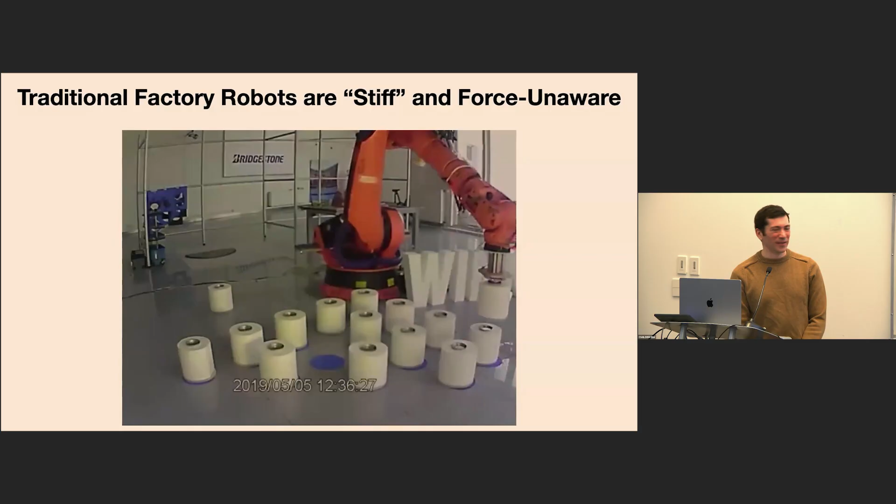They're simply position controlled, so all you can do is command the robot to go to a position, and it'll try to do that no matter what. If something gets in its way, one of two things will happen, or might be likely to happen: either the robot will break something in its surroundings, cause damage, or it'll damage itself.

So finally, let's fast forward to what is the frontier of robotics today. In the past decade, I think we've seen the rise of this paradigm with data-driven learning in simulation. These are just two examples from right before the start of my research career.

One thing that's really critical to understand about this data-driven learning is that it's different from the way that the other control systems I showed you before were designed. Instead of programming how the control loop should respond to different types of inputs, the control strategy is learned from experience in the simulator.

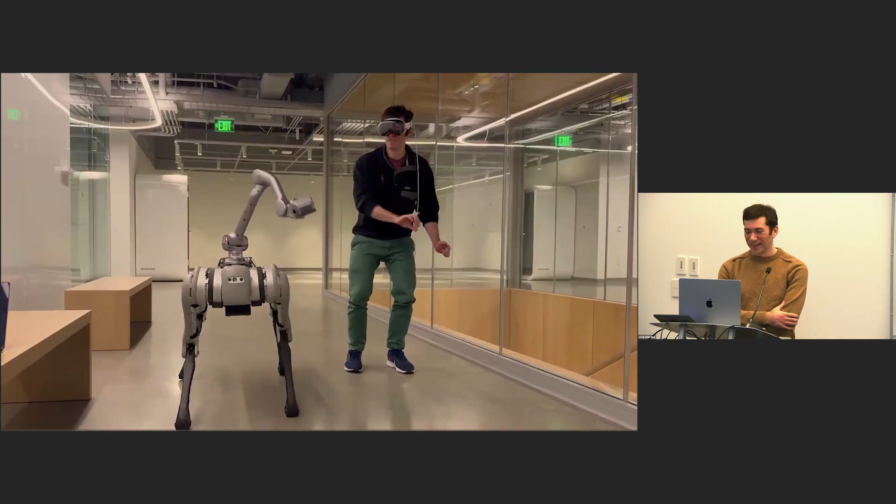We developed a controller that could both walk around and also move the end effector to match a teleoperator who's wearing a virtual reality headset capturing their wrist motion.

This was sort of an emerging but maybe known way of doing things at this time. You'd have some neural network policy, and it would observe the sensor data of the robot and output actions, and it would also observe the desired wrist command supplied by some teleoperation rig. But during training, maybe that would be randomized.

Our simple proposal, just to understand the properties of training something this way, is to replace the position command with a force command. So instead of the teleoperator saying 'go to this position,' the teleoperator will say 'apply this force.' That's especially relevant if the robot is, for example, pressing up against a surface like a whiteboard and needs to control how hard it's pressing, which might not be well described through just a position command.

But the question we ran into is how can we train this? The typical way of training would just be to have the robot walk around in free space. But if you try to apply some force in free space, the robot will never experience any external force, and the hand will just accelerate. This really is the key difference we need to think about in data-driven methods.

We don't just need to define the objective of the system and the model - the robot also needs to experience the types of interactions that we want it to be able to accomplish in order to learn a good response.

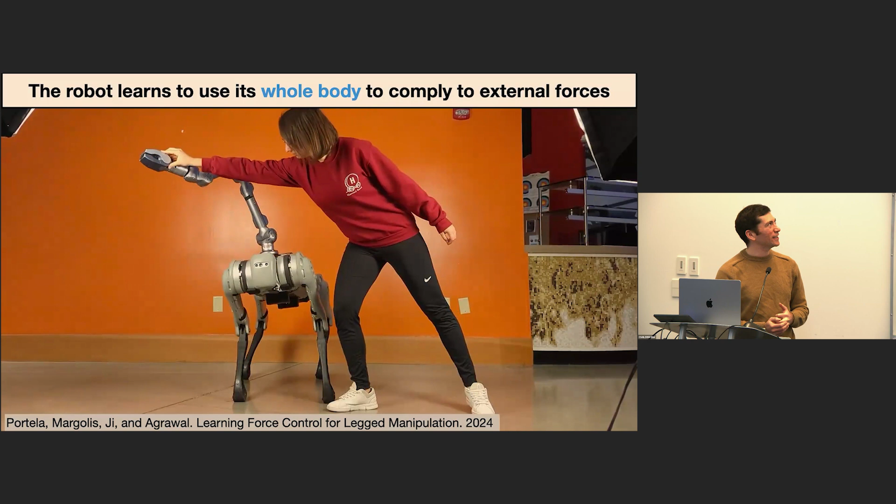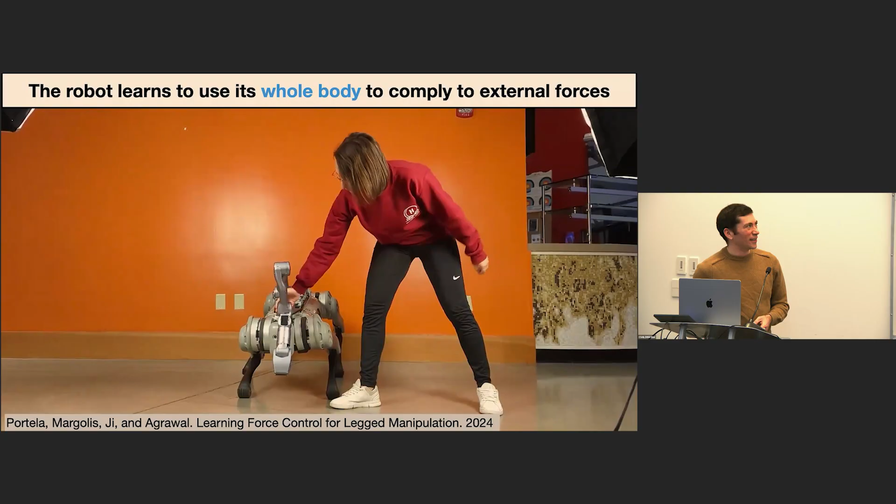We trained this policy and deployed it on the robot, and there's my collaborator Tiffany manipulating the end effector. The policy is able to realize this compliant control of the robot, where if a human grasps the end effector, they can move it around.

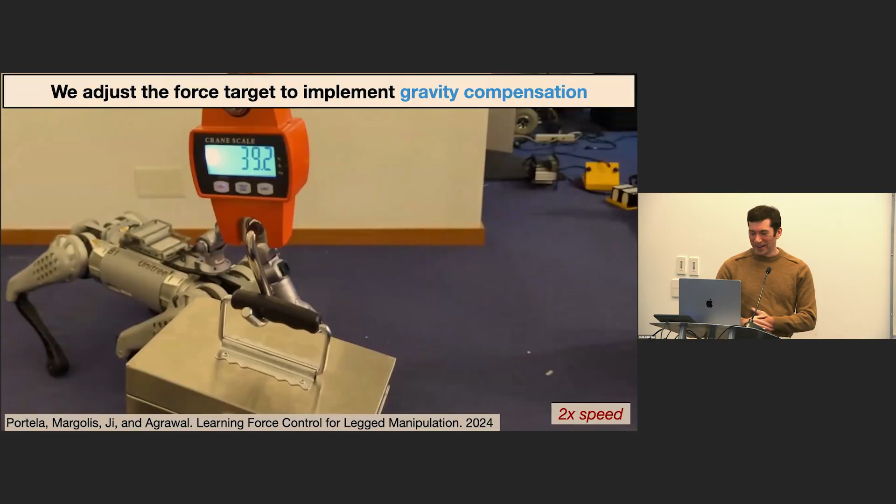We also showed in this force control mode that we could do some basic gravity compensation behavior. We loaded up this canister with some bricks, and when the robot's commanded with zero force, it'll just sink to the ground. But if we supply a force command that counters the brick's mass, it'll keep it elevated while remaining compliant, so we can manipulate the canister through space without supporting its weight.

We also did some experiments, with more details in the paper, to measure whether the robot is really realizing these different force commands in the real world. Actually in this system it was responsive—there was some error. We also found later there was a bit of an asymmetrical gap in this arm that was resolved in some future work.

Another interesting thing we did with the system—it's kind of interesting to control force, but it's not that useful as a teleoperator. Most of the time you don't have that much intuition about how much force should be applied, and it's kind of unwieldy to command this through a joystick.

So on top of this force control policy, without any additional training, we implemented an impedance control loop where we took the position of the end effector and compared it to the desired position supplied by the joystick. Then we computed the commanded force based on some stiffness parameter—essentially just a Cartesian PD controller. We also have a damping parameter, and by manipulating the stiffness and damping parameters, we could realize different types of compliant behavior in the robot's end effector while also controlling its position.

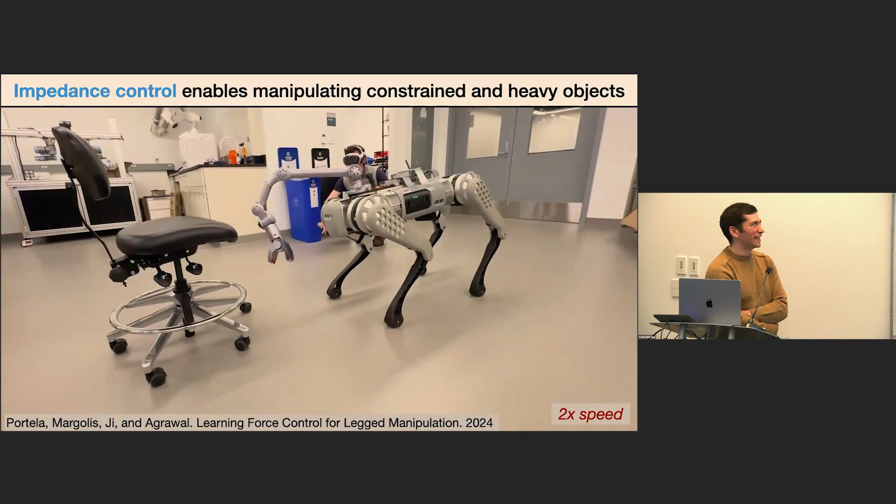We put this on the real robot and teleoperated it in impedance control mode, and showed that it can do some basic loco-manipulation tasks, and is even capable of dragging a very heavy object.

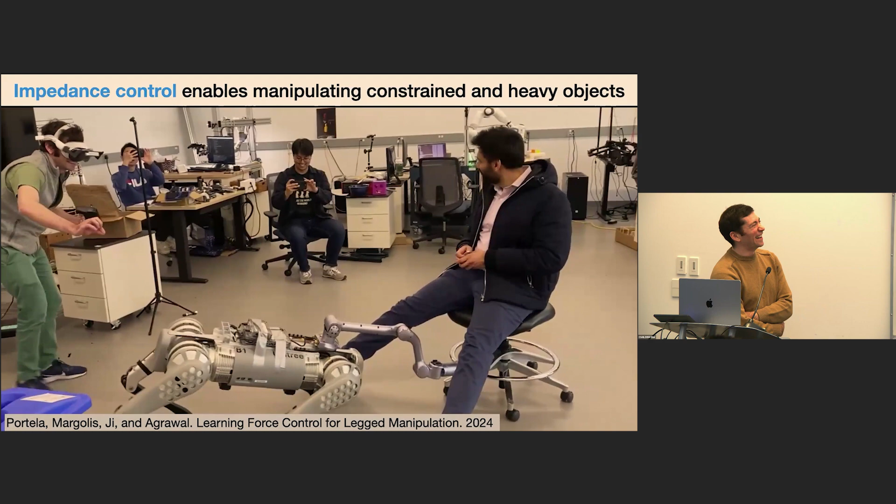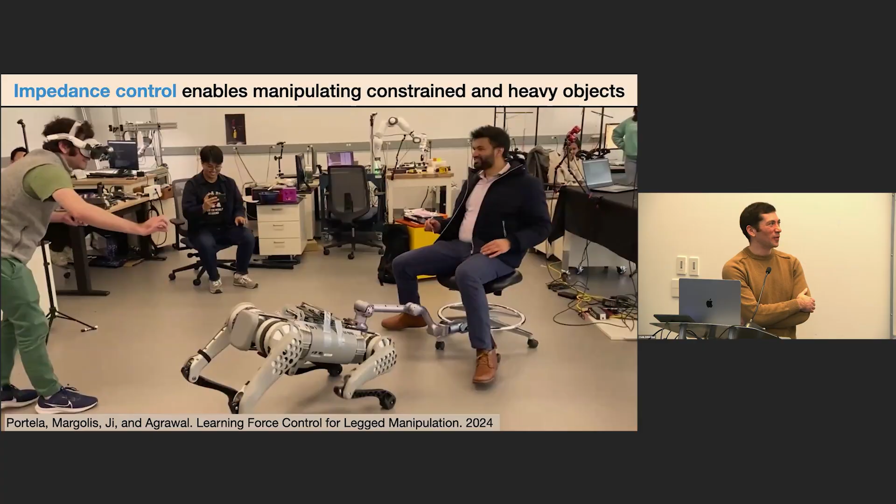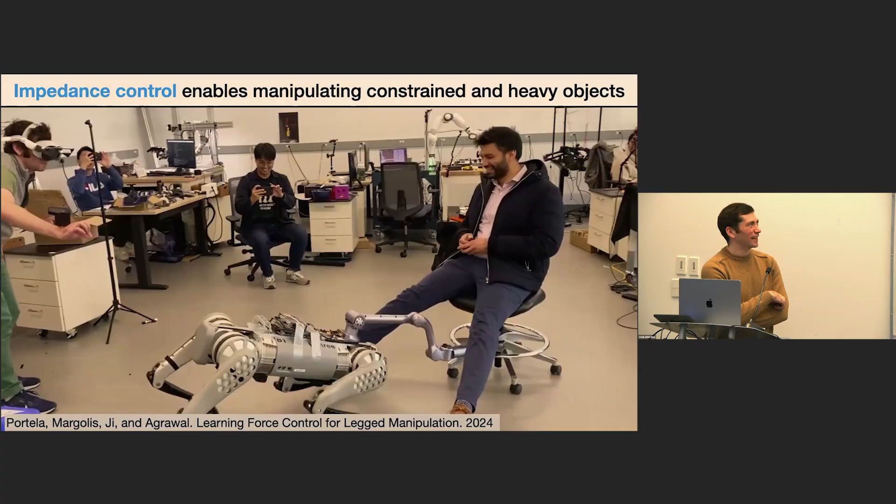I think this is actually a great example of where compliance really helps, because the robot's moving around—it's hard to keep the gripper in exactly the same spot. There's really a constraint in the system: if you try to push down through the chair or pull up through the chair, you're going to get a big reaction force. So it's important to have some compliance to achieve these types of constraint tasks.

The second project I'll talk about to illustrate the role of contact in learning is active sensing policies. The main question we try to answer is, how can we optimize force interactions to gain information about the environment?

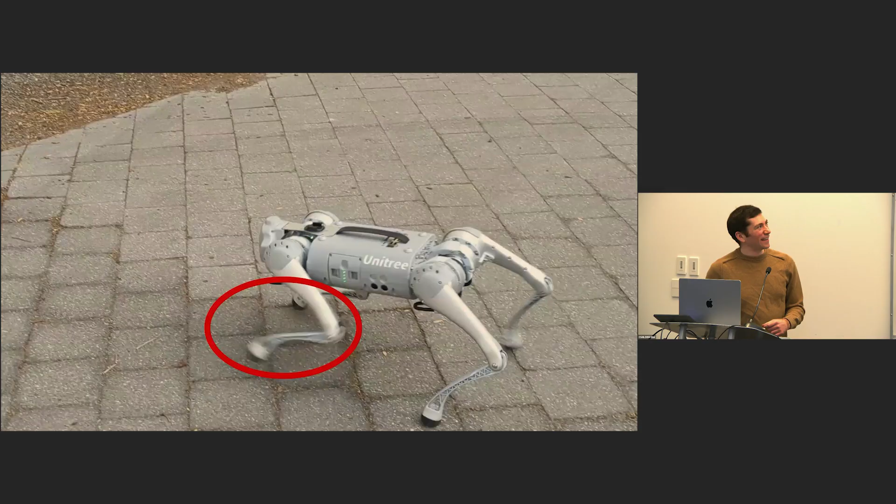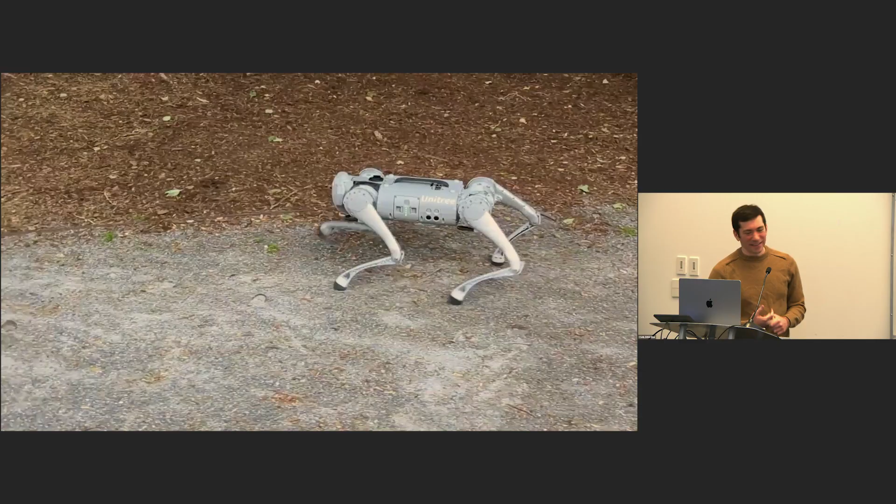This was the method we proposed in our paper, and the robot learned this gait. If you pay attention to the front legs, it's actually intentionally swiping its feet more than necessary to just walk, or maybe even more than is efficient. But it's doing this to gain additional information.

These are results from sim, but we have real results that match in the paper. If you train the estimator just passively, you'll get a cluster of predictions around the mean where you can't really tell what the friction is. Sometimes you slip and get a low friction prediction, but there's almost no high friction prediction.

But when you do this active sensing approach, the policy can learn to walk in such a way that you get these calibrated and more precise estimates across a whole range.

So we took that actively trained estimator and deployed it, walked it across these different terrains, used it to label the images, and then trained on top of a DINOv2 backbone a patchwise friction predictor based on the local appearance of the terrain.

We evaluated this quantitatively, but also through a demonstration: we took a drone up, captured an image of the terrain, inferred the friction parameter, and used it to perform path planning for these different modes of locomotion.

We executed the plans on the real robot and found that things matched up with the prediction. When walking, it was more efficient to take a direct route across the grass. When dragging the payload, dragging across the grass was actually higher friction and slowed it down, so it was better to stay on the sidewalk.

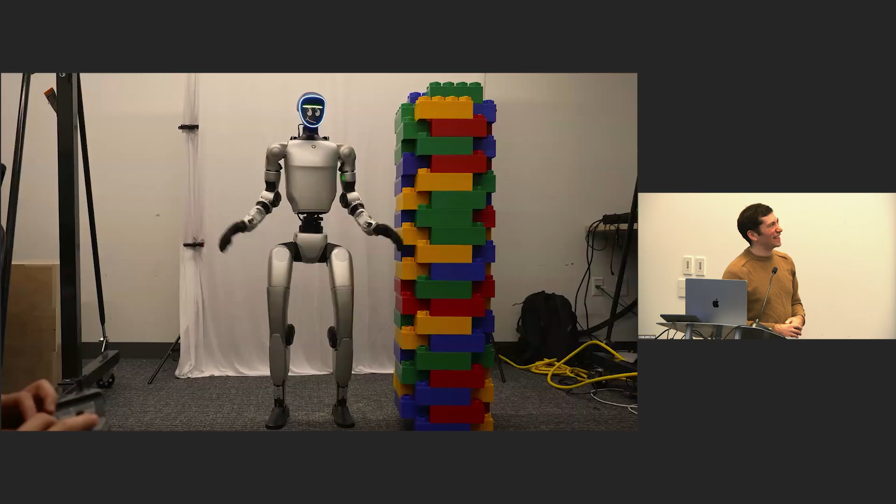Now let's consider what happens when we put the same robot next to this Lego tower. We hit the start button and this happens. So the question is, what will happen next? What I will argue is that it's useful to think about this force that's going to occur.

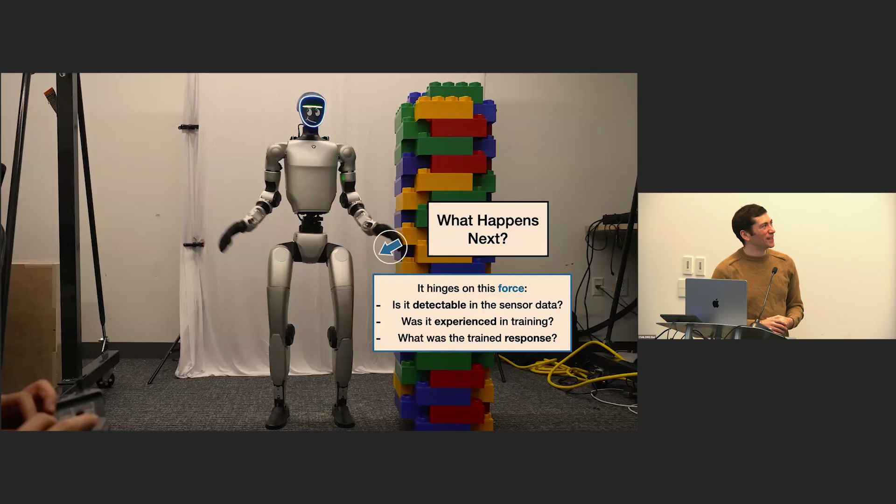Some especially relevant questions are: can we actually detect this force in the sensor data of the robot? Did the robot experience this type of force during training? Because if it didn't, then it won't know what to do. And finally, what was it actually trained to respond with when it sees this type of scenario?

Unfortunately, what we saw is that in the existing standard way of training motion tracking, the robot will be very stiff, like that robot arm you saw at the beginning, and there are many undesirable failure modes that can happen.

So why do existing methods end up this way? If we think about the motion imitation setup I described, we reward motion tracking for some reference, and to make the robot robust to disturbances, we typically apply random external forces. But what you're really telling the controller to do in this case is remain in the same posture regardless of how hard you push it, which is essentially the definition of stiff control.

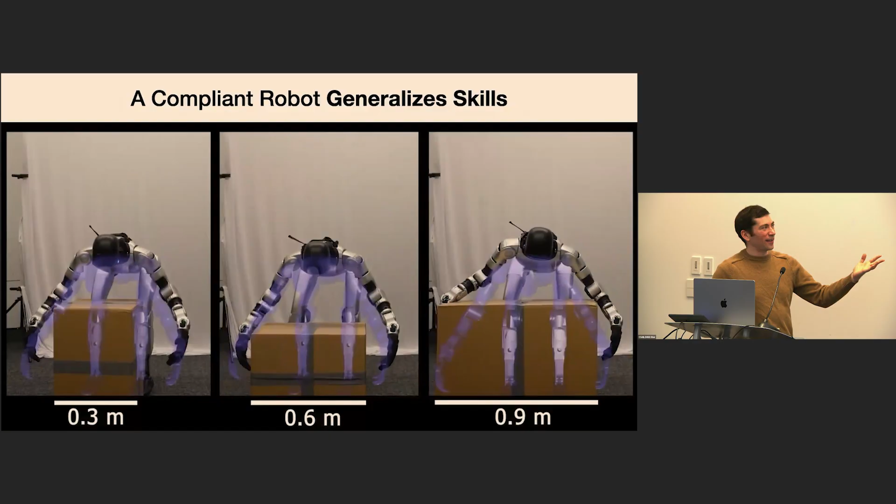And it wasn't explicitly trained on misplaced boxes. This just emerges from the generalized compliant response as an objective. But then when the box is in the correct spot, we can also see that the same exact reference motion is able to pick multiple different boxes without either over-torquing the robot or damaging the box.

And in that original example of doing the T-pose, we find that the compliant robot is able to detect that force or the constraint that it's not able to move up. And then instead of smashing through the Lego tower, it can just gently tap it, without damaging the environment or the robot.

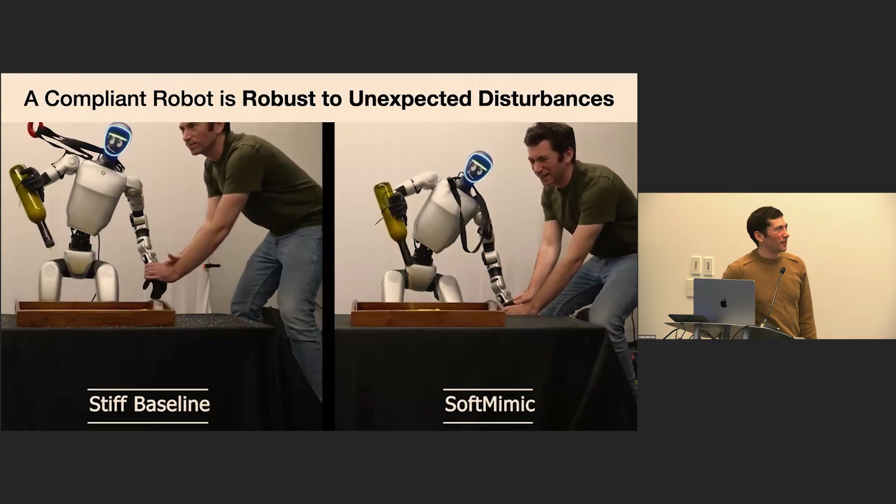We also did a simple manipulation demo where it's pouring sand out of this bottle, and the stiff policy reacts poorly when its hand is forced down, but the compliant policy can move naturally.

And finally, this isn't just limited to standing in place. We also showed that we can learn compliant control with a walking reference motion and other types of motions. So in free space, the robot's able to walk with the same quality as before, but when it's dragging some object, it is also able to let its arm wiggle around without nudging the object up and down aggressively.

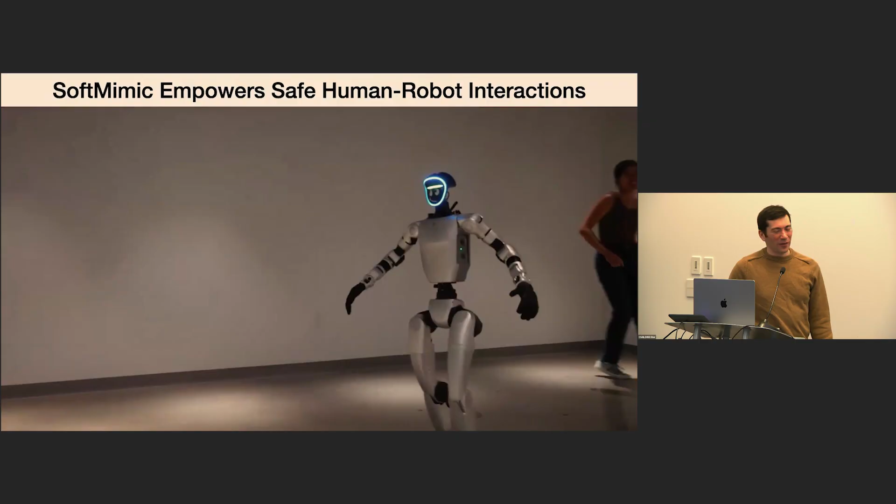And this even works for human-robot interaction where the force might be sort of unpredictable and irregular.

So, in conclusion, to summarize, I presented these three different projects that are all tied together by the idea of doing better learning with forces. What we could see is that by better considering the way that the robot handles external forces in data-driven policies, it can respond better to humans, it can better understand terrains, and it can interact more naturally and gracefully with objects.

So to summarize my argument again, we've had these sort of compliant controllers for a long time, but the shift to data-driven control has unlocked both new opportunities and new challenges in this space. But I think that if we do this type of force-first robot learning, and continue to develop it, we can make modern dynamic robots more capable, general, and safe.

But of course, I'd like to talk a little bit about some of the limitations and future work associated with these projects. So in the compliant motion augmentation, we're using this IK solver. It relies a lot on heuristics, and it's still an open question how we can scale this to, A, how well it works for very dynamic motions, and B, how it scales to motion data sets that are larger.

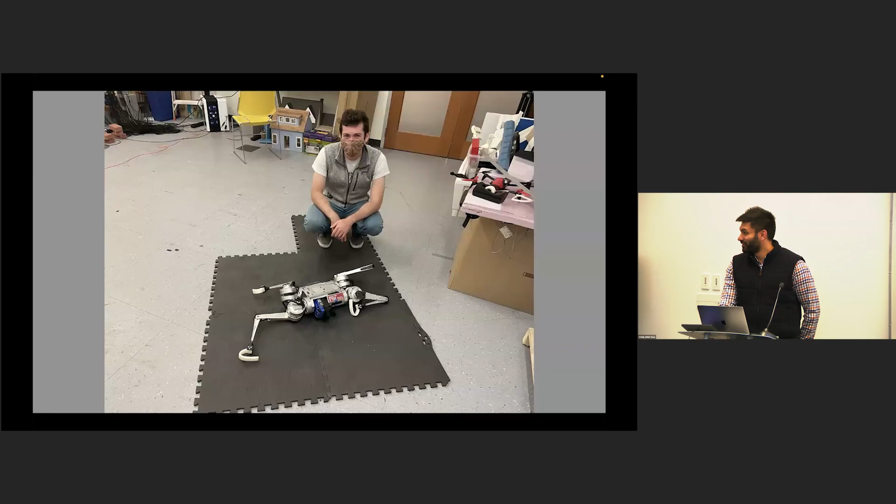This is when Netflix came along and we were setting up the demo for them. This is when they really wanted to get shots of simulation, but I guess Gabe didn't want them to - you were too keen to show them the real robot.

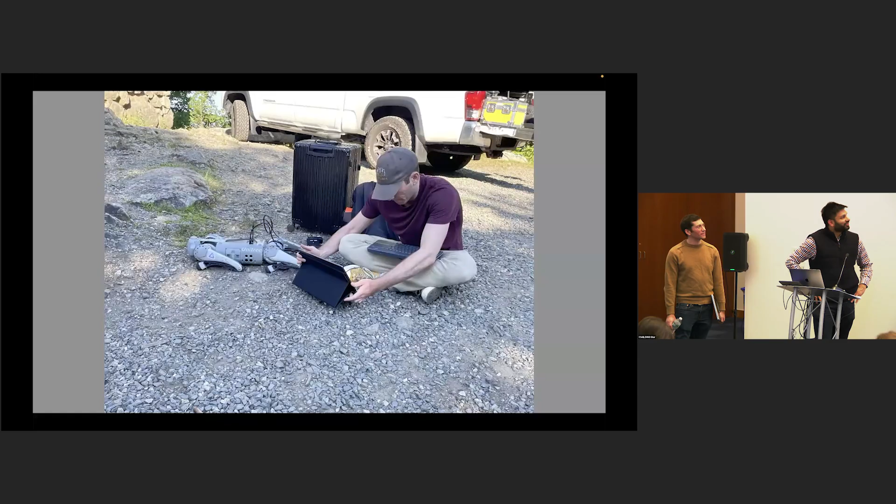This is what would happen once you would go outside the lab, just trying to get the robot to work. With some work, it would go up and finally be on top.

Here is packing my car with stuff before we go off on a retreat, and I'm always late.

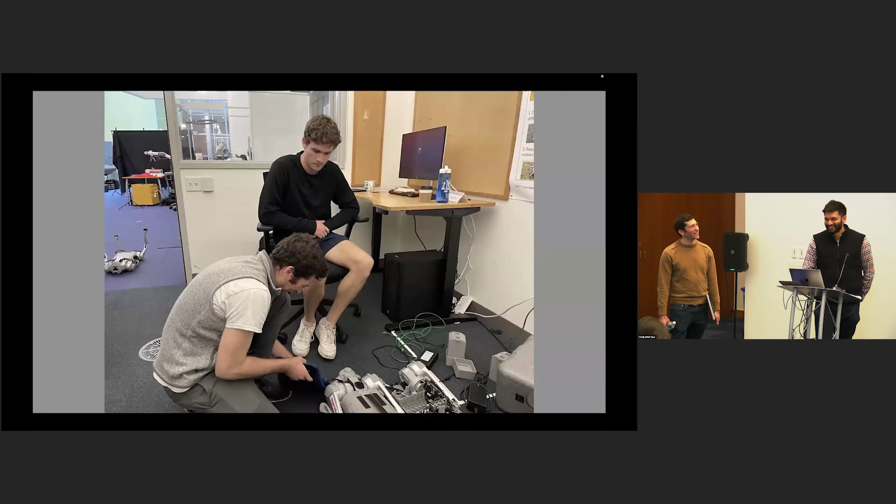This is, I think, one of our events. And this is one of the late nights when we are getting Indian food and trying to prepare our paper.

So many fun memories of having you, Gabe. It's been an absolute honor and pleasure to have you in the lab, and we're going to miss you if the committee decides that you can graduate.

We could keep him. And I guess after that, it might look like this, but I hope we can keep it to this, Daniel, as you're saying. So with that, let's give Gabe a big applause.